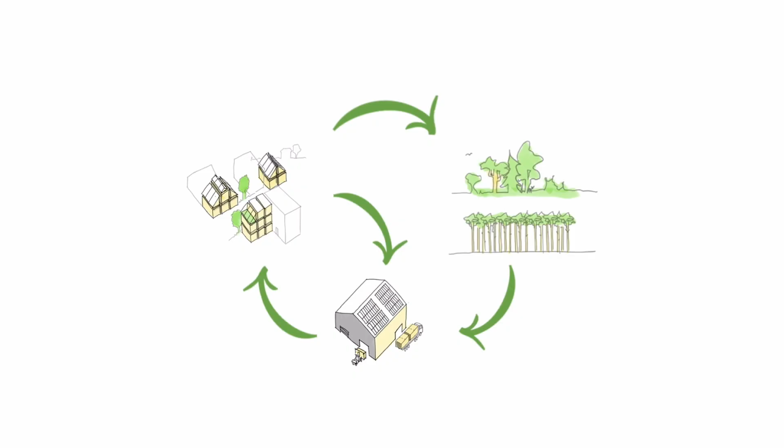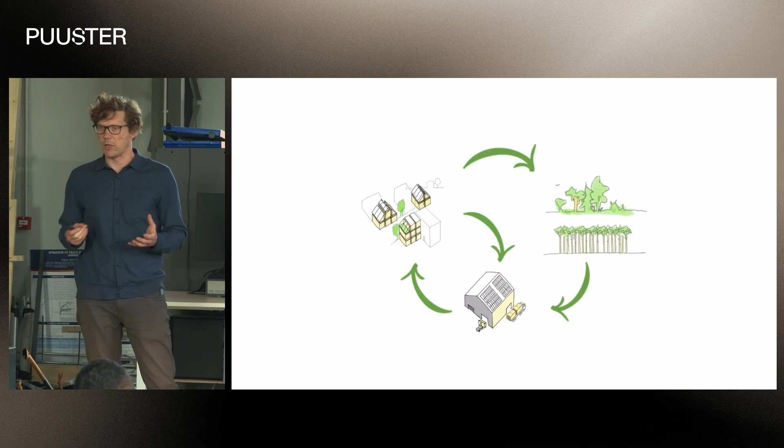When we talk about circular construction, I think we talk about taking less material from the nature, taking more material from the built environment. But maybe the less covered topic is actually how do we take it from the existing environment. And I strongly believe that prefabrication and design for manufacturing, assembly and disassembly is a key part in it.

So I would like to focus on this smaller part of it, and my argument is that we can't take a linear economy and turn it into circular economy, right? We can't renovate our buildings to be circular. Yes, we can renovate our buildings, but they won't be circular buildings. We have to redesign it from scratch. And part of it is actually prefabrication.

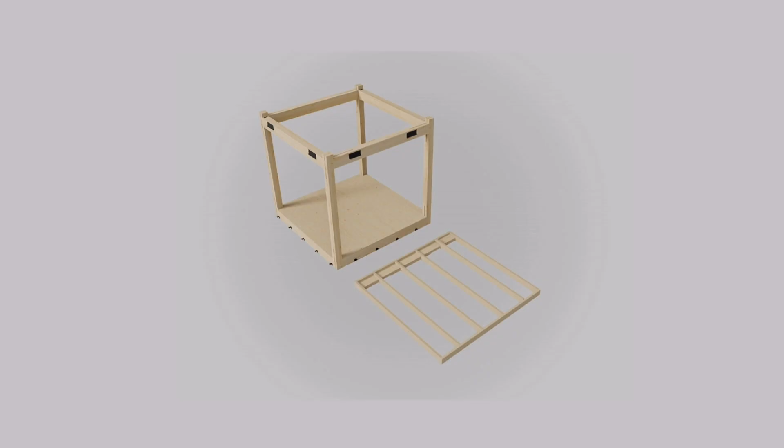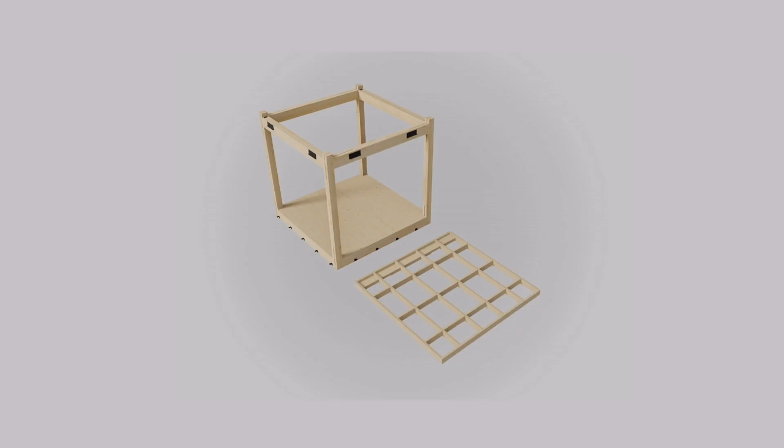So my hypothesis is that the higher the degree of prefabrication, the higher level of circularity we can achieve. It's not just about assembling components together, which is the core idea of design for manufacturing, assembly, and disassembly. It's also about how do we take it apart, right? If we engineer that correctly, our future buildings will be circular.

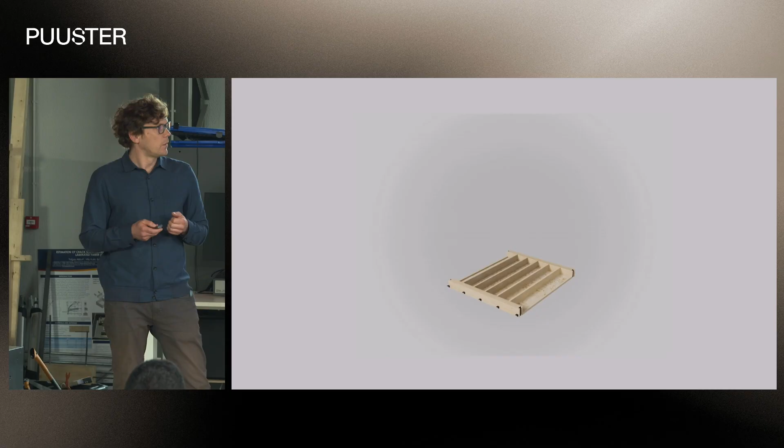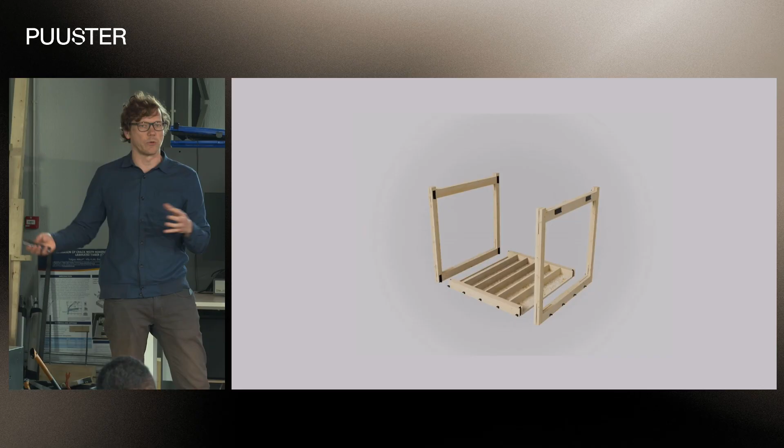So what is this degree of prefabrication? It's the difference between construction, making something on site, as opposed to something being produced in the factory, brought on site, and installed rather than built, right? The higher we get to this logic, the better circularity we have a potential for.

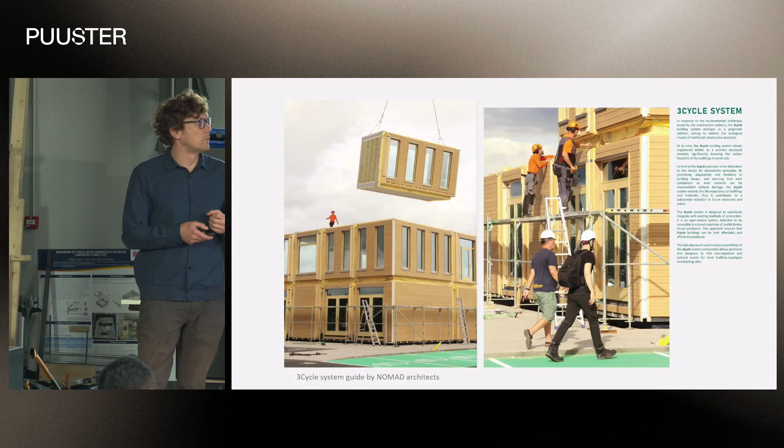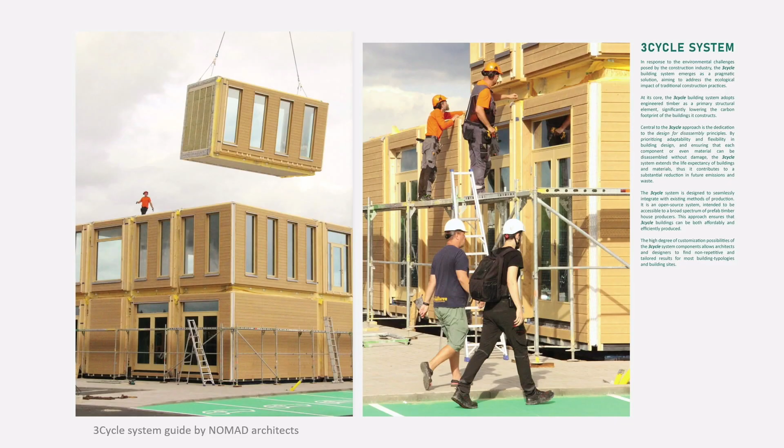So we have created this system. It's an open source system, anyone can use it. I'm standing in one of the modules that is the precursor of the system, so the first version. We have re-engineered it a couple of times. So it's a great stage, I'd say. And the primary intention of the 3Cycle system is to give the platform for all of the topics that we have discussed before.

So how can we reuse the wood? How can we use less used wood species? So we approach it from a different angle. Like we say, what do we need? What are the sizes for the components? And that gives anyone who's been on the stage before me a frame, where to apply it. So my invitation to all of you is to think about, can we use the material that you're providing in a 3Cycle system? It gives us the boundaries to produce.

So let me just move forward and explain why this is the way that we also need to be thinking about. But before that, I will explain a little bit about the circularity of the system. So it works on many levels. It first works on the building level. If you have a defined box, you can quite freely move the components in it. So you can take one module, you can repurpose this module. Currently it's a stage, it can be a small house, it can be part of a kindergarten, it can be a school building or office building. And we have tested it with many typologies and say that yes, it can be.

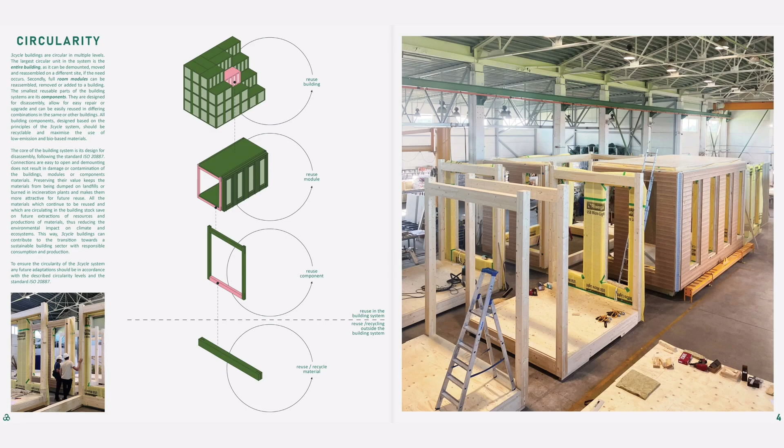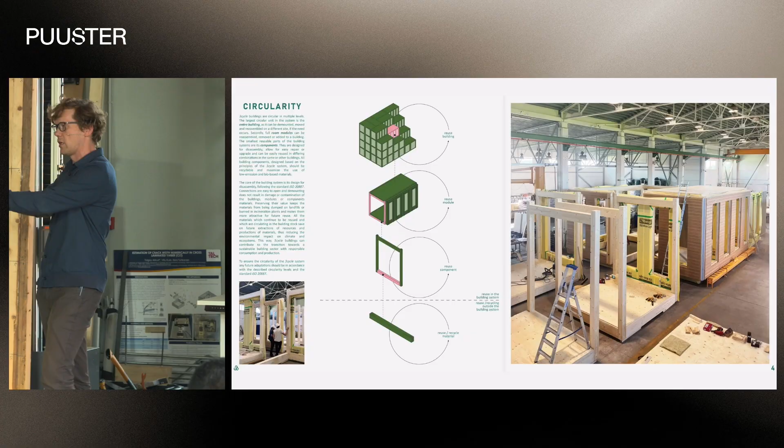Then the next stage is actually the component of it. So talking about the post or the beam or the floor slab. These are the components that we can reuse now in different buildings. You take one module, you take this end frame away, and you can reuse the floor component. You can take this end frame into beams and posts, and these are technically also reusable. And of course, it's timber, right? You can use reused material.

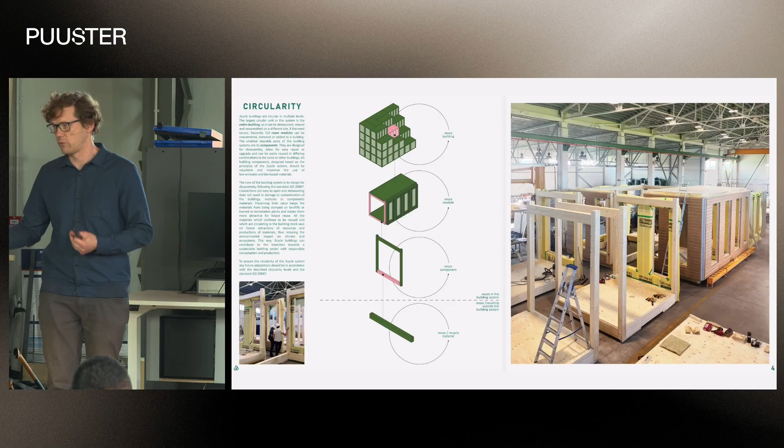However, one of the key elements are connections. I think it was mentioned before as well. These connections need to be reversible. So they need to be easy to put together, easy to take apart, easy to put back together. Yeah, that makes a circular economy.

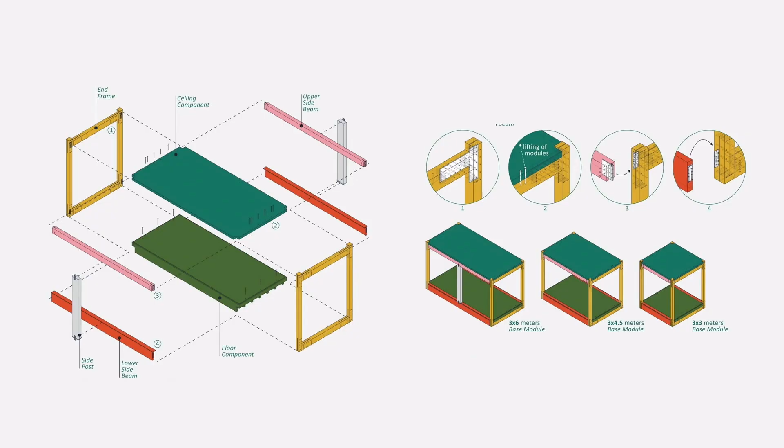So I'm not going to go into more details, but these are the components I'm talking about, the CLT roof. Can we make that out of reclaimed material? Yeah, technically, yes. Why not? If the engineering is correct, we can use it, right? 3cycle provides the platform to actually test it and use it.

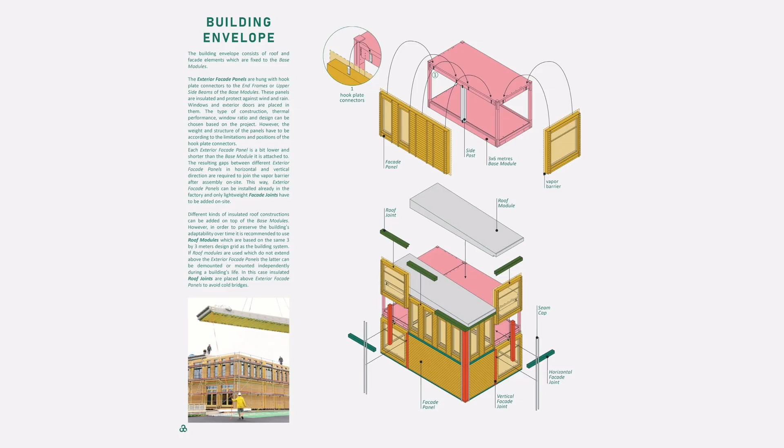And the second aspect of reusability is keeping the structure of the building separate from the skin of the building. The external envelope different from the structure. I'm currently standing in the structure. The walls would come on top of the frame. So it would be a balloon frame, a new kind of balloon system. So your walls are on top of it, your roof is detachable from the structure.

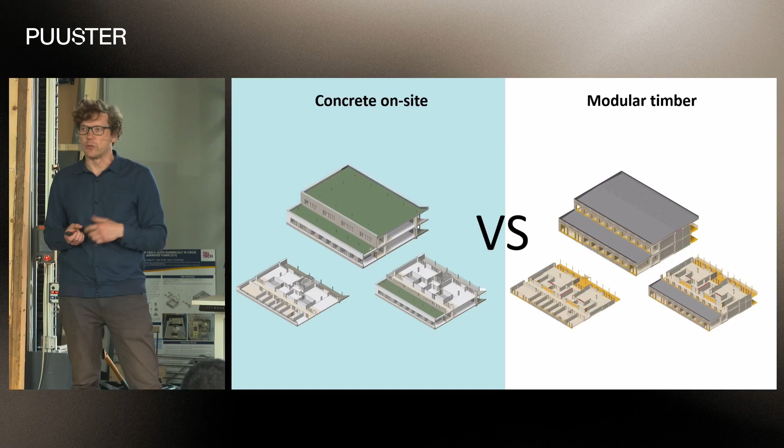Jumping into a short study we did, it was actually done with this system, the 369 we called it back then. We took an existing kindergarten, actually built now in Rõõmupesa in Mustamäe, quite close here. Done from concrete mostly, and also partly precast and prefabricated. We redesigned it using this system and compared the embodied carbon footprint, without much optimization. With this, we actually reduced the footprint 2.2 times.

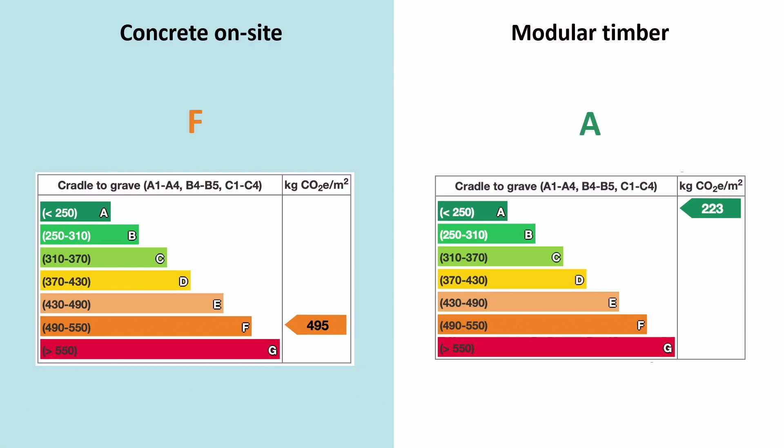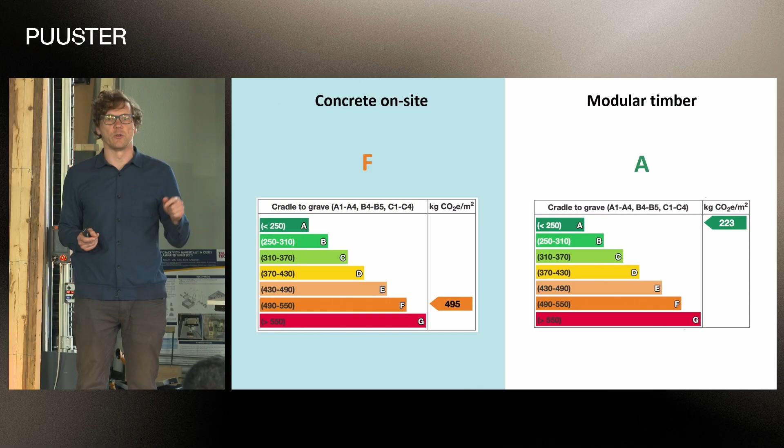Getting 3 or 4 times better than concrete buildings, I don't think it's a problem. Especially we have these metal corners. This is huge, actually. That's already been redesigned. Nearly 1/3 of the entire module was in the corners and the connections, and that's now been redesigned. But even more surprising was the weight of it. 5 times lighter than the concrete building. And that, of course, builds the basis for circularity.

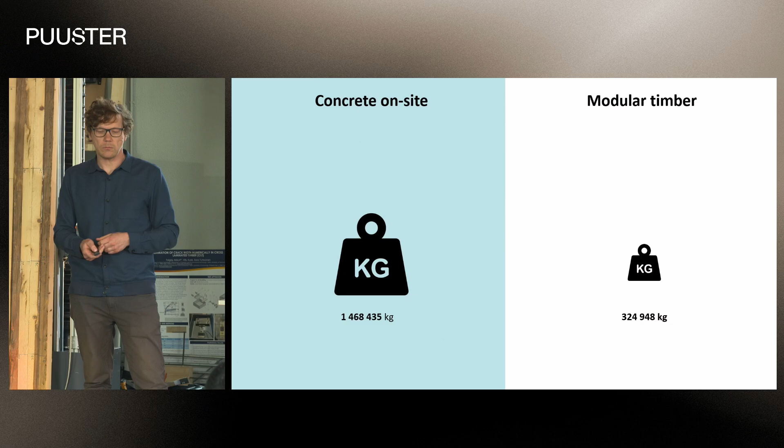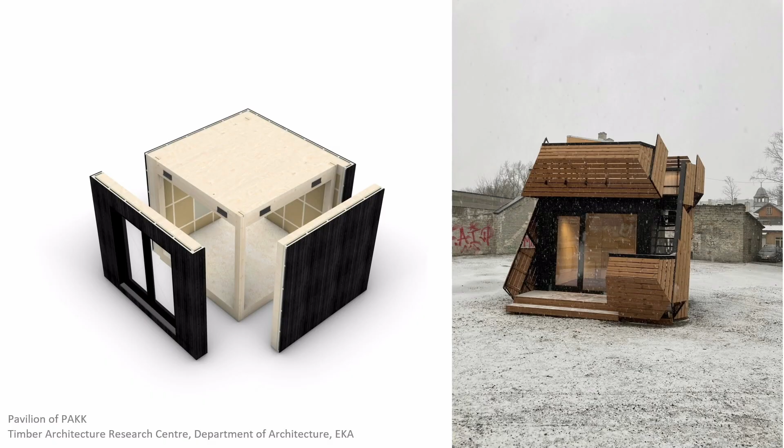Okay, let's have a look at what we've already done with the system. It's not just an idea, we've gone through it. You've seen this building before, Silla was talking about it as well. The base of it was one of those modules, M3, which is 3 by 3 meters. And you can skin it any way you like, really. You can make it look local. It doesn't have to look like a box. It can almost look like anything.

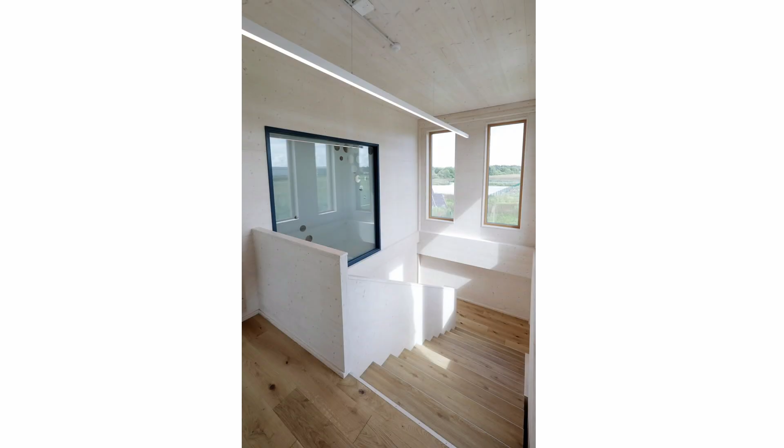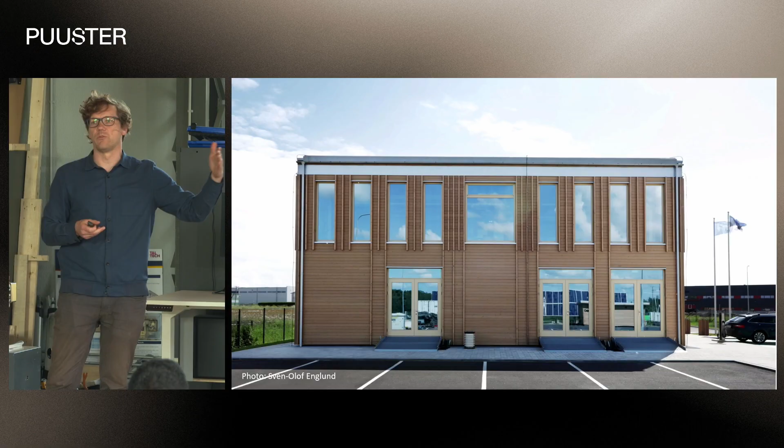Elektrilevi Training Center, about 420 square meters, made out of the recycle system, built almost 2 years ago by now, and heavily used. And they want to extend it already. They said they started using it so much, and we said, okay, fine, let's take the roof off again and build another story. Easy, no problem. A little bit harder to extend it from the sides because of the site constraints. But technically, with the system, you can take the wall off, add another module, reuse the wall. So that is the basis for it.

Inside, we tend to leave it quite simple. We hang technical systems on the frame, so we don't hide them. That also increases the circularity, and I think it's a new kind of aesthetics. Why do we have to hide those technical systems? The aesthetics of the building should talk about the function of the building, I believe. Technical systems are not prescribed. Currently we're talking about the same kind of white panels you can see here for heating and cooling. It works highly well with the modular system.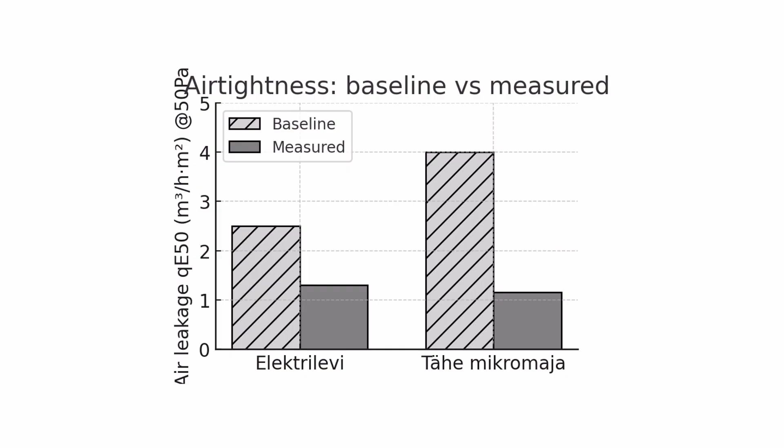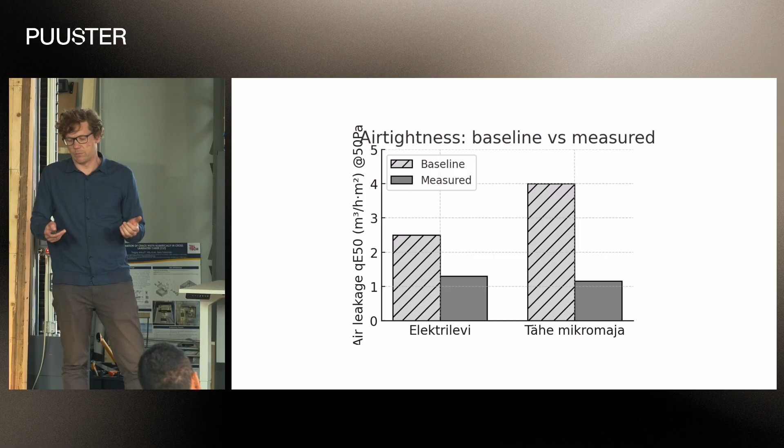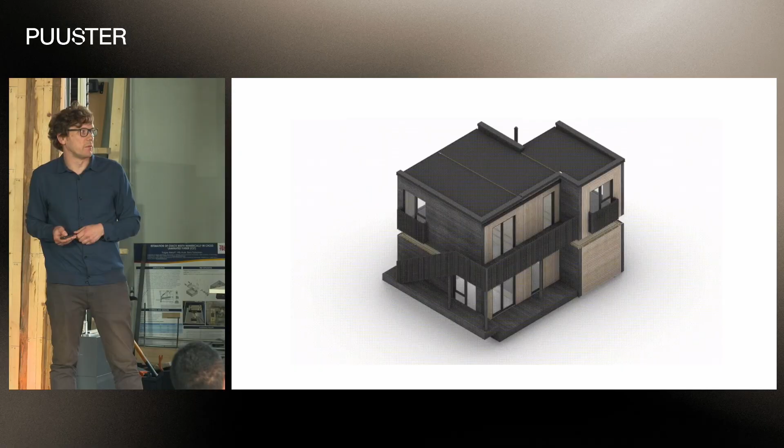A couple of technical tests we carried out with both of the two previous buildings. These are not very good values, but it shows we are way below the required levels of air leakage. So it's way better than the standards require. But we can get better than that. I think there were a couple of holes in the building. The way we do our science is we actually get it built and then measure. That shows technically how it could go together from 3 modules, but the same system would allow you to take it apart and build a 2-story building.

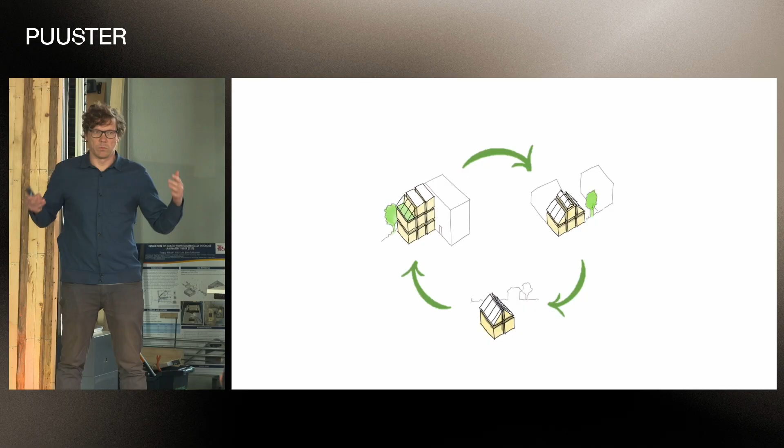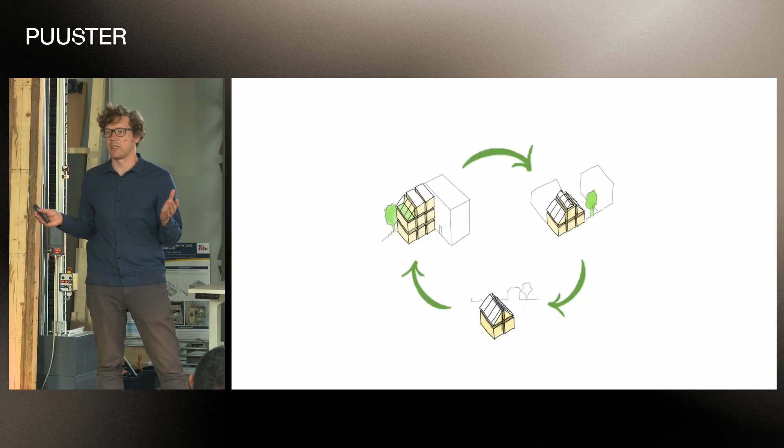So we're showing it with different kinds of buildings. The same module, exactly the same components, maybe slightly different skin, but also componentized, can be used in different buildings. That should give us enough confidence to say, okay, there's a system. Can we build the components for the system? I would love to see those components made from recycled wood, from less used resources, from different species.

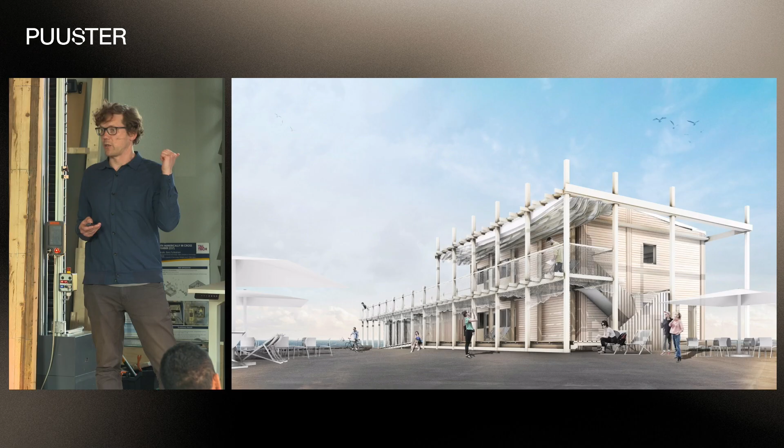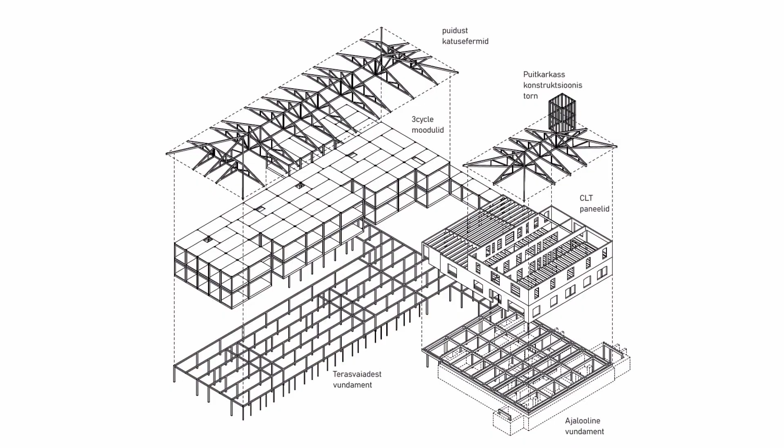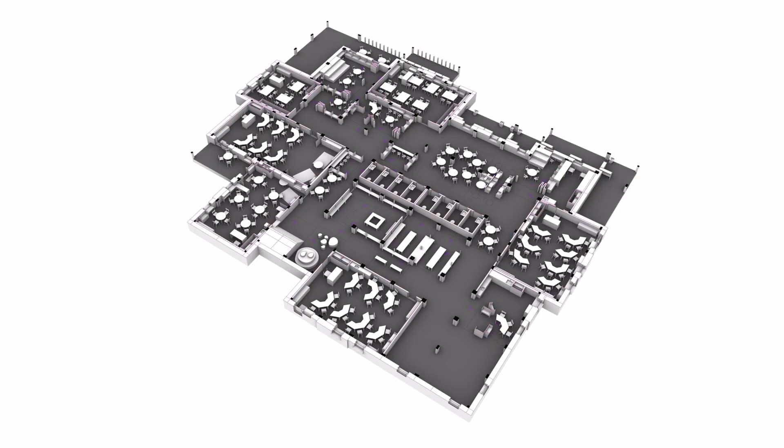Next buildings: this building is currently being built on Stroomi Beach. If you go there, you will see the beginning of it. Ready in a couple of weeks, probably, the main structure. This is currently in design in North Tallinn, a 3,000 square meter kindergarten made of the same modules. You can see the modules here. One third of it is not out of modules because it's required by heritage. And we're now designing modular kindergartens and classrooms for use everywhere in Estonia, in Tallinn first, but we also have a commission from Kärdla. And next in line are school buildings.

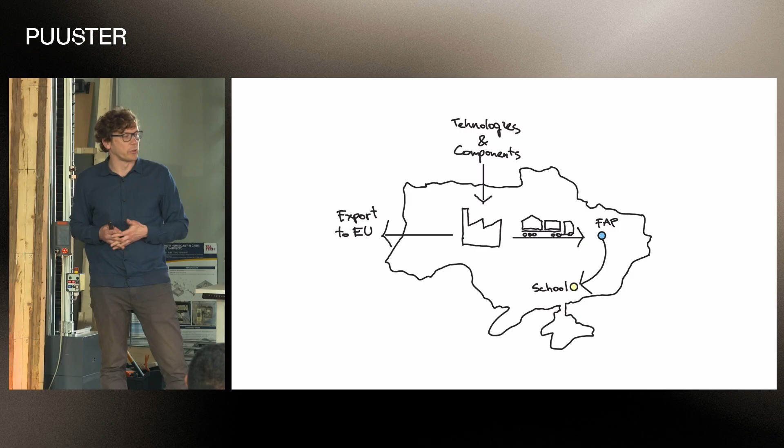You also saw the example we're designing in Ukraine, another building typology, potentially being reused as a school building or kindergarten after the war finishes.

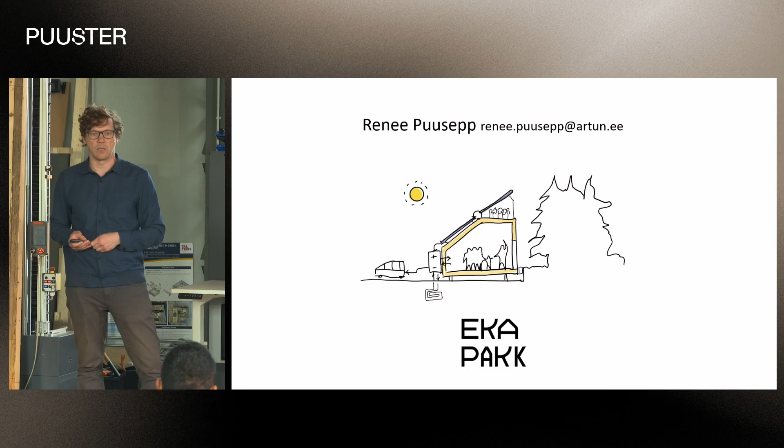So if you're interested to learn more, come and talk to me. It is an open source system, so it can be applied without any fees. It's done mostly in the Estonian Academy of Arts, but many engineers we see here have been part of it. So thank you for taking part in it, and we're looking for further collaborations. Thank you.